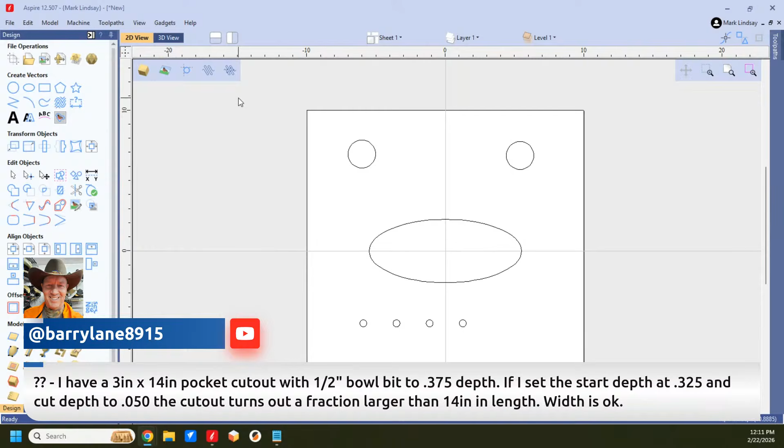I've got, let me add another sheet here so I don't get rid of my demonstration. So we're going to add a new sheet, and I'll call it sheet 2. I'm going to go over this. So you have a 3-inch by 14-inch. We're going to go for 0, 0, and your width is 14, and your height is 3. And we're going to create that rectangle.

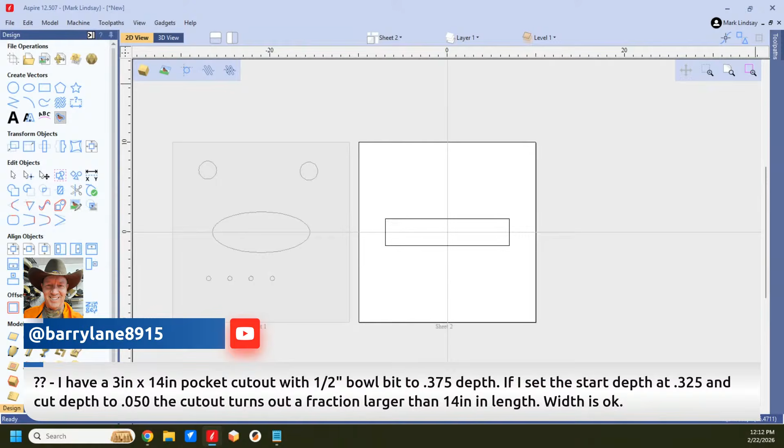All right, then we're going to hog it out. We're going to use a bowl bit. You have a 1/2-inch bowl bit. I think I'm going to go with, I have a 3/4 inch. Let's see here, maybe I can do it with the 3/4 inch. I'm using a pocket cut, and you want to go 3/8 of an inch deep, so 0.375.

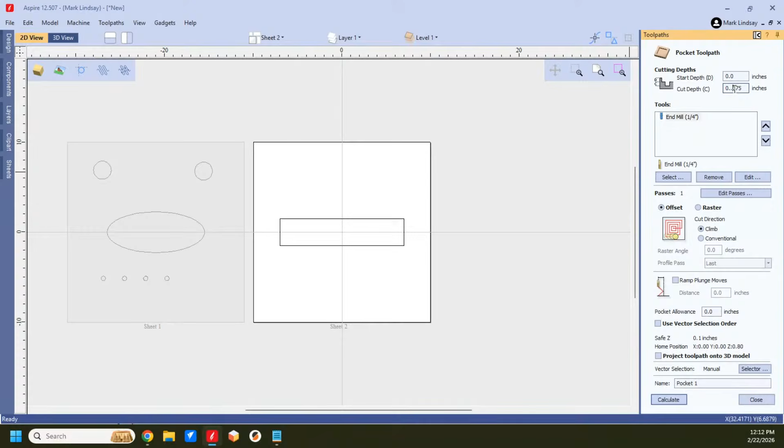And let's see, we're going to get rid of that. I don't know if you're hogging it out with something else. Oops, get rid of a decimal, don't want to make that mistake. Remove. And I'm going to select my 3/4 inch bowl and tray bit. See, there's that curve, but it's basing the size of the cut off of the center of the bit. That's where it plunges in. And we're going to select that.

Now, if you come down here and we look, it's going to go 0.375. Let's get rid of that decimal, I thought I did that. There, it's going to take 3 passes.

Now you want your last pass. I clicked on Edit Passes. You want your last pass to be 50 thousandths. What we're going to do, you can see we've got 3 passes here, and it's going to take them in 1/8 inch bites, 3 1/8 inch thick passes, or deep passes.

You can set a last pass thickness of 0.05, like you said. Click Apply. And now what it's going to do is use that bowl bit to hog those 3 out down to 0.325. Then the last pass it makes, it's going to go ahead and plunge down to that 0.375 depth.

This will take care of that issue. So you're doing the entire thing with that bowl bit. There's no misalignment, there's no assumptions. When you create 2 separate tool paths to do this, you introduce variables. You introduce the accuracy of your machine, the accuracy of your control software, the repeatability of all of these things.

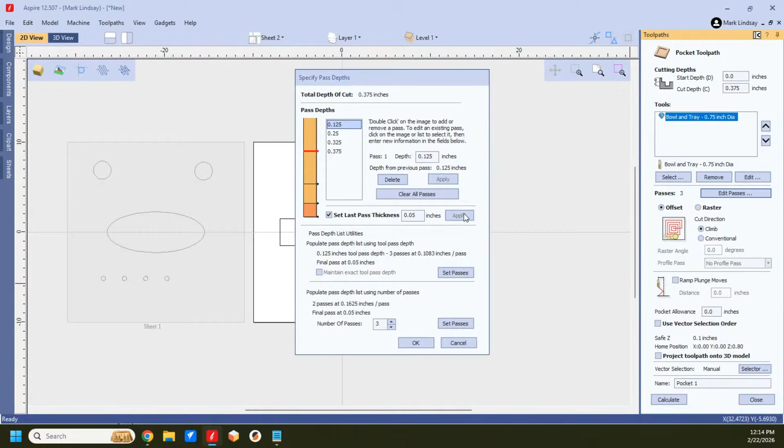So by just setting a last pass here, and then click Apply, then click OK, it's now 4 passes, but that last, okay, you are using another bit to hog it out. Personally, I just use the whole bowl and tray bit. I would just use the bowl and tray bit. You're going to get a better final result.

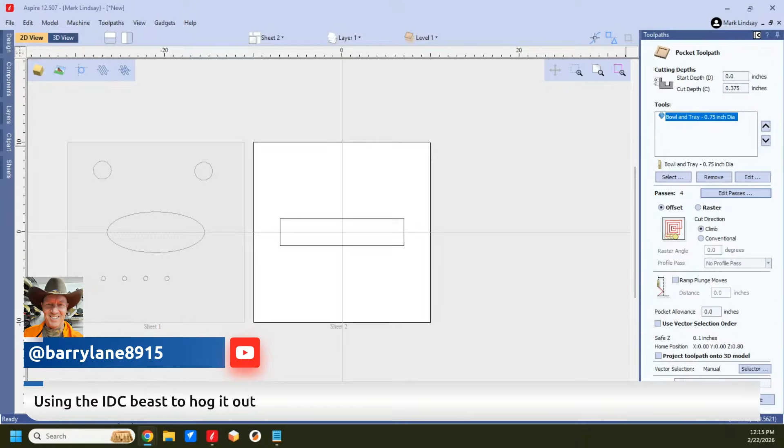Yes, using that beast to hog it out may save a little bit of machine time. But here's where we get into the priorities. If the priority is to hurry up and get it off the machine, you may have to compensate this bowl and tray bit with your start depth of 0.325. You may have to compensate for that misalignment or for that variable.

Now, if it happens every single time you've tried this, there may be other issues at play. But if it's a one-time thing, I would still prefer that 1/2 inch bowl and tray bit, that 1/2 inch bowl bit. It can handle stress, believe me, it can handle it. So I would just go ahead and use the one. I wouldn't even bother hogging it out with the beast.

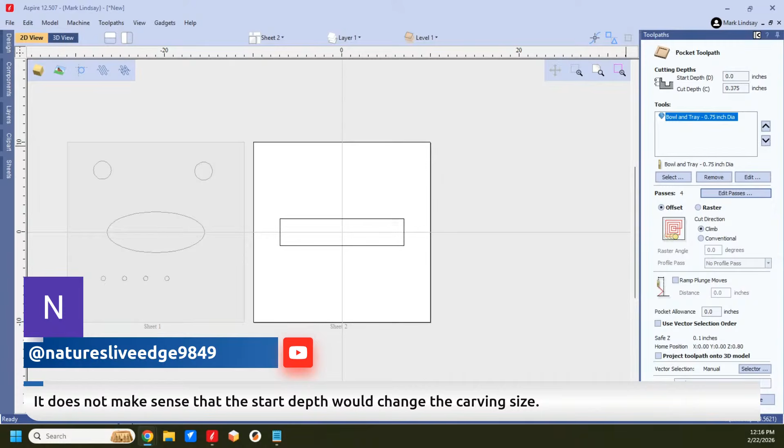No, it does not make sense to me either, Pete, but that's the way it was explained to me. Basically, what it is, let me get back in here. The software is trying to compensate for this shape, but basing the toolpath calculation off of the center of the bit, and sometimes it can get thrown off a little bit here and there.

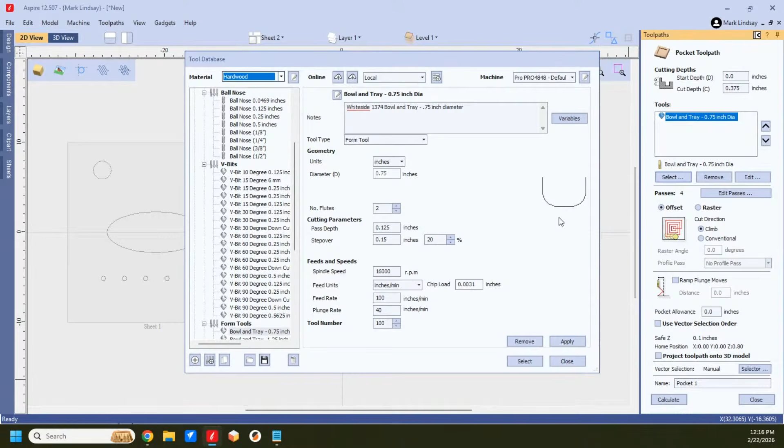And again, that's because of the tolerance of the software. Let me check what my tolerance is. I believe I'm still at 0.0004. Toolpath settings, 3D toolpath tolerance, yes, 0.0004.

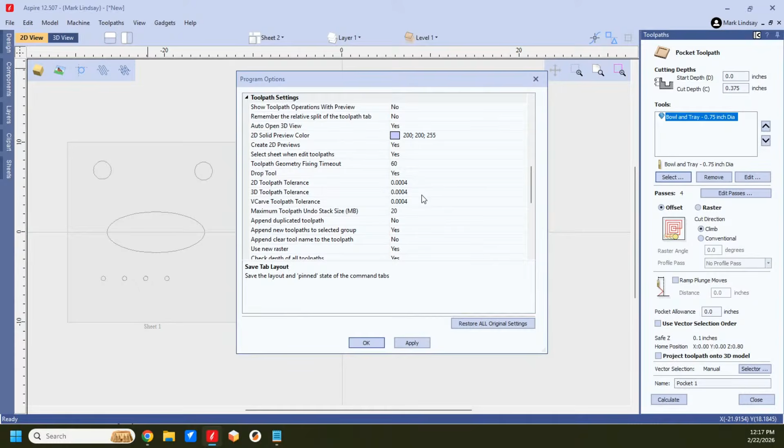That'll get me fairly decent repeatability. But then what is the tolerance of the control software? And what is the tolerance of the machine? The control, Mach 4 for instance, had a tolerance of 1 thou, so it would get you within 1 thou. But also we have to look at the tolerance of the machine. So this, the Avid, is half a thou, that's the tolerance on it for repeatability. So you've got a 1.5 thou variance right there.

Now we've got to take into consideration the actual dimensions of that bit. It's a 3/4 inch diameter bowl bit, but 3/4 inch diameter is nominal. What is the actual diameter? So you see what I'm getting at. There are a lot of different variables at play that can all pile up to throw it off.

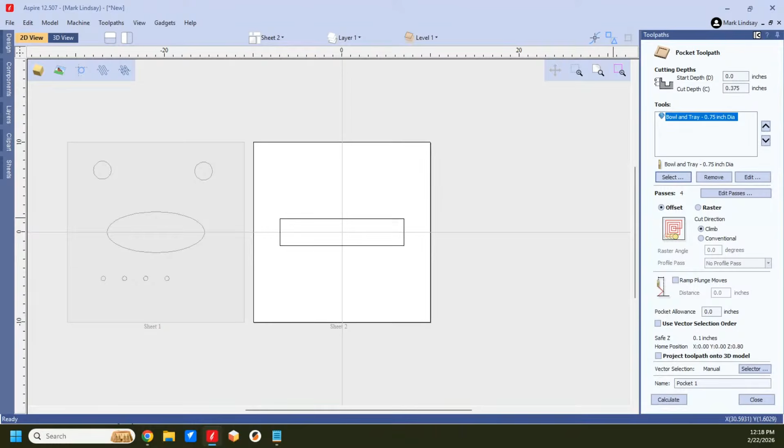That's just been my experience. There's a lot of things that'll throw it off. And like I say, if it's happening all the time, then I don't think those are the issues. I think there's something else involved, be it machine calibration or just the Vectric software compensating for that curve of that bit and making it just slightly larger.

Michael Mezalick says, an option: tell the machine you're using an end mill, but put in the bowl bit. Yeah, I mean, sure. Personally, Michael, my preference is to just go ahead and hog it all out with that bowl bit.

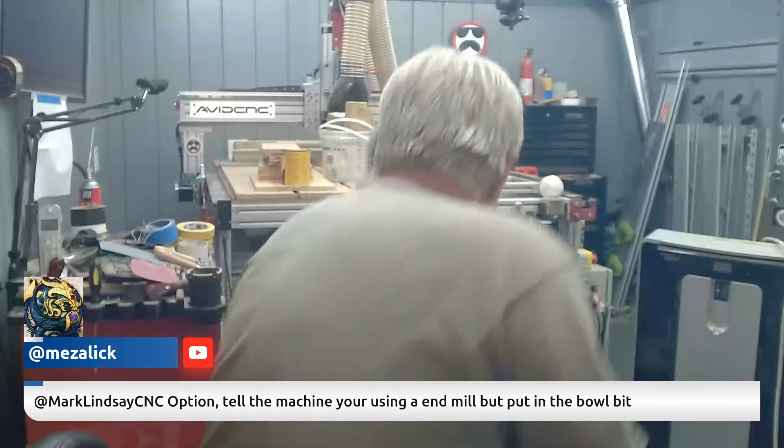Now, I don't know which bowl bit you're using, but this is a Whiteside 1374 that can more than handle hogging out 3/8 of an inch deep. I could probably modify this, I could probably do it in 2 passes. With this machine, maybe a single pass, who knows. But that'll hog out some material right now, mister.

So I just use the bowl bit.

Ellen says, I lie to the machine once in a while. If it works, it works. Yeah, and sometimes you do have to lie to the machine. Sometimes, for instance, a keyhole bit, the tool database will not let you enter any bit that makes an undercut, so you have to lie to it and tell it it's an end mill, for instance.

Dovetail bits, they create an undercut. You have to lie to it.

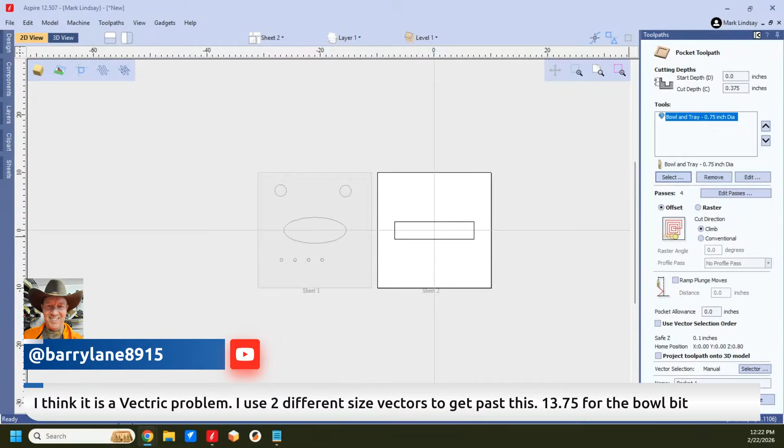I would shoot them an email, let them know what you're trying to do, how you're ending up doing it, and see if they have a cure for you. And ask them if it will be corrected in version 13. Not so subtle hint, Vectric. This is one of the reasons why I just go ahead and use the bowl bit for everything. But that's just me.

What can I say? See, did I miss any questions up here? No, it doesn't look like I did.

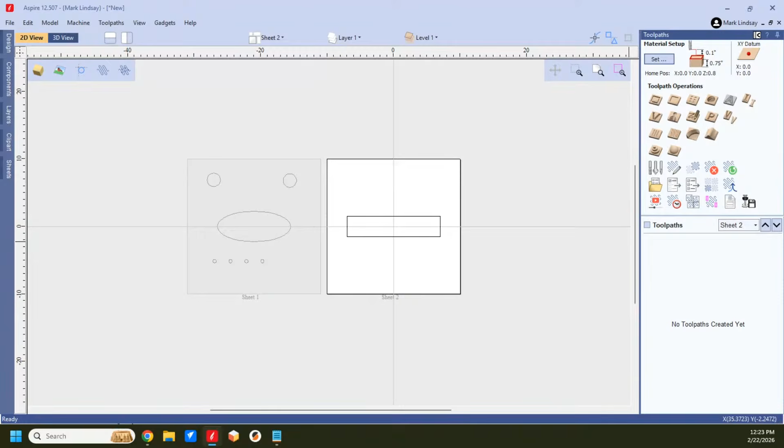Okay, well, while I'm here, I'm going to go back over to sheet 1, since that's what I have my little demo here. I've never done a video on them, but it's something, especially in version 12 plus. A few things have changed in the software. You longtime users, you know what I'm talking about. Vectric changed around a few things in the interface, and they added some extra, I don't think they're calling them toolbars, but I'm going to call them toolbars, up here on the left and the right of the screen.

And they're easy to ignore, easy to forget they're there. I've never seen anybody actually go through and talk about them, so we're going to talk a little bit about what's going on up here in these 2 toolbars.

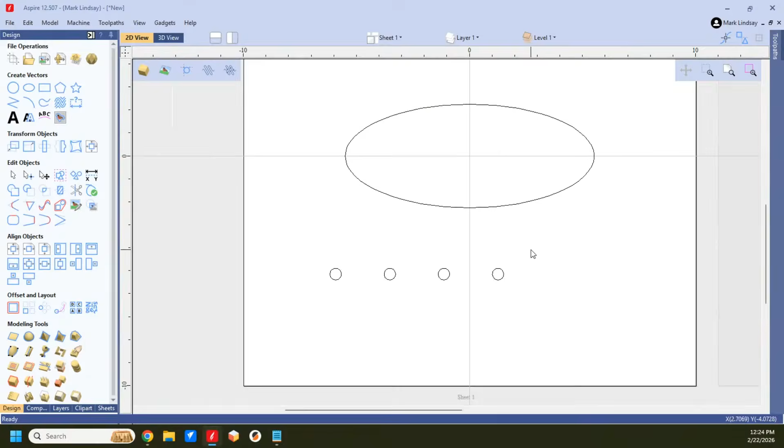The one I use most often here in the 2D view are the pan and zoom controls over here. Now, I don't know even why they included this, I guess some people don't have a scroll wheel on their mouse. But basically, if you click on that icon, you can pan around your view, move around this way and that way, until you click it again and it shuts off. If you have a mouse with a scroll wheel, a lot of people don't know that scroll wheel is a button as well, just push down on it and you do the same thing. But if you don't have a scroll wheel, or it's not a button, you have this up here to help you pan around.

I see some people use the bars here and here, and that's fine, but pushing down on the scroll wheel is just as easy.

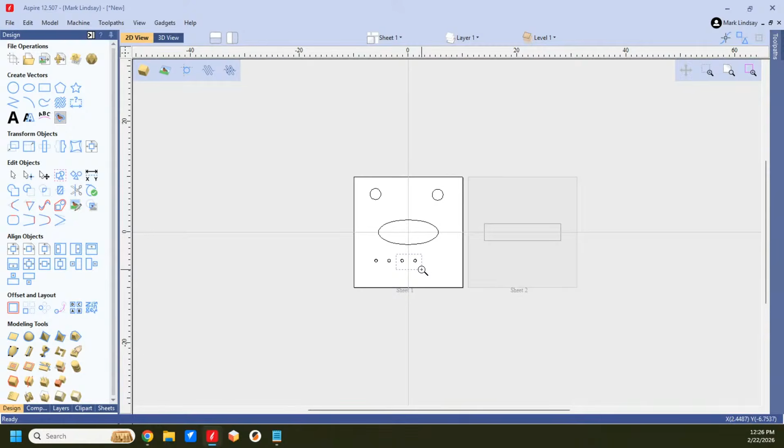The next one over here is zoom your 2D view to a mouse-drawn box. Now this is a single use, every time you use it you have to click it. So I'll click it, then come over here, and you see my cursor turned into a magnifying glass. I draw a box around those 2 circles right there, and it zooms right into those. Just a slick little way, but if I try it again, nothing. You have to click it every time you want to use it. Just a slick little way of zooming in on a specific area.

The next one here, I use a lot. This zooms out to show the drawing limits on your piece of material. So if I just go ahead and click that, it zooms out and it shows the limits of both sheets.

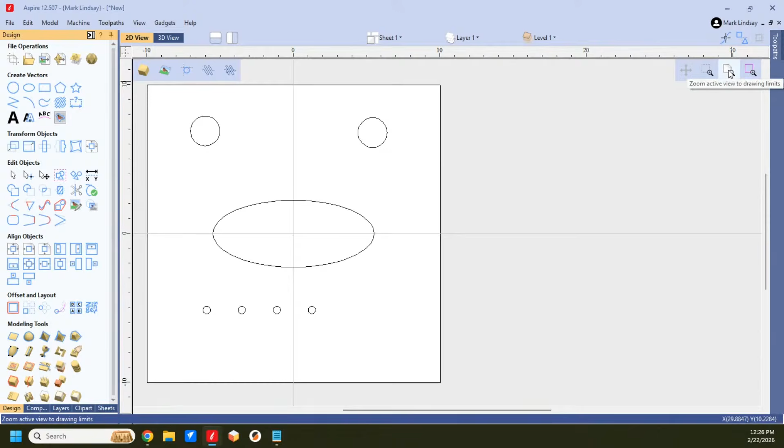Now, if I come over here, select sheet 2 and delete it, come back over to the design tab, and I'm just using one single sheet, and I click that center icon. It puts it right in the center and zooms in so I can see everything. So if I'm zoomed way in over here playing with a little detail, I can just single click and I'm zoomed back out to look at the entire project. I use that one a lot.

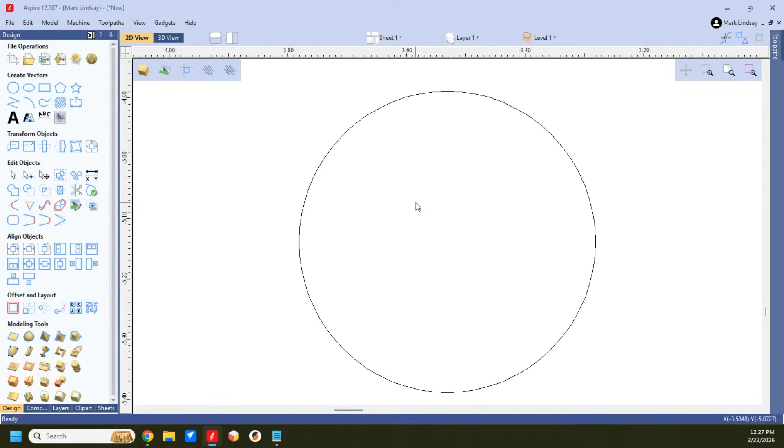Another one we have here is zoom to the selected objects. So if I come over and I select that circle and click on it, it's going to zoom into that circle and put it right in the middle of my screen. So I can do whatever work I want to do with it, maybe draw a crosshair in it or something of that nature, and then just click to come right back out. I use these two quite a bit.

I forget that this is here, the mouse drawn box. I forget that's there. But I never use the pan 2D view.

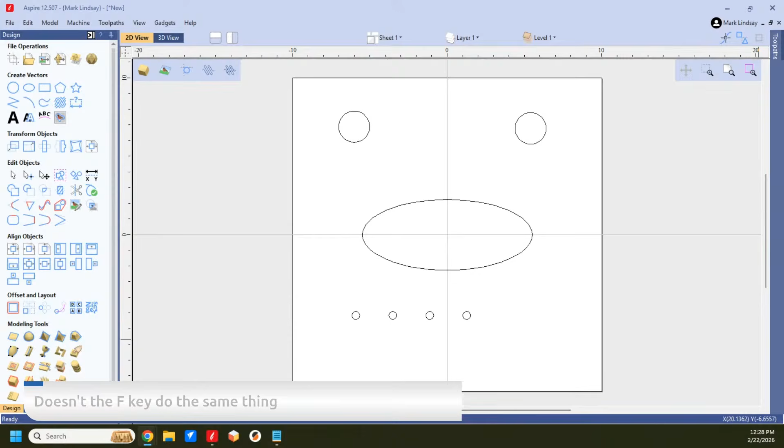Steve Russell says, doesn't the F key do the same thing? You know what? I believe it does. Let me zoom in, come down here on my keyboard and tap the letter F. Nope, it doesn't. Make sure... Oh, it does. Okay, I guess I hadn't clicked back in. So yeah, that's the keyboard shortcut. Hit the F key, then it zooms back out.

If you wonder about keyboard shortcuts, you can come right up here to the help and go right there, second one down, keyboard shortcuts. Oh boy, but be prepared. It will open up a browser window, and there are a lot of keyboard shortcuts. Believe me, be prepared, you'll be overwhelmed.

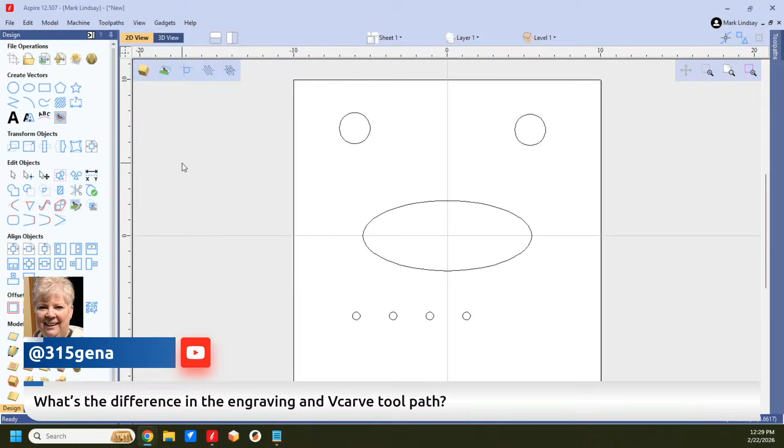315gena says, what's the difference in the engraving and the V-carve toolpath? Let's jump over here. We're talking about the engraving toolpath and the V-carve toolpath. Let's take a look at the engraving toolpath.

The engraving toolpath was, generally speaking, created to be used with something like a diamond drag bit. Now you can use a standard V-bit with it, but it was designed to follow outlines and then do fills, if you want them, with straight lines or a hatch or a cross hatch. You'll see down here, you've already got your saved toolpath. It will preview, but the preview is going to be light because this was designed to be just basically scratching the surface of something like brass or anodized aluminum or something of that nature, again using a diamond drag bit.

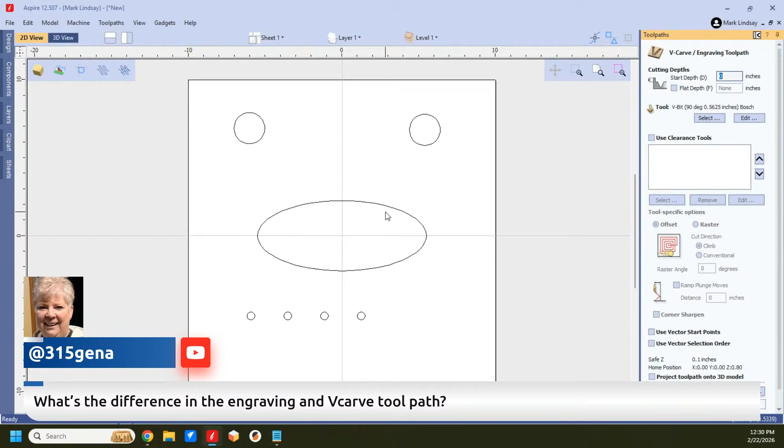A V-carve toolpath is meant to be used with a V-bit and maybe a clearance tool. It's used basically, as the name implies, to carve between two vectors. The depth of that carving is going to be determined, again, by the space between those vectors. V-carve toolpath will give you square corners, should you have any in your design.

Where the engraving toolpath is going to follow the outline, and then if you add a fill, it will do a hatch or a cross hatch. It's not going to carve this out in the middle. It will do a fill to give you a hatch or cross hatch if you want it, or just an outline. It's not going to carve out the middle. I hope that answers your question. And it's a good one too.

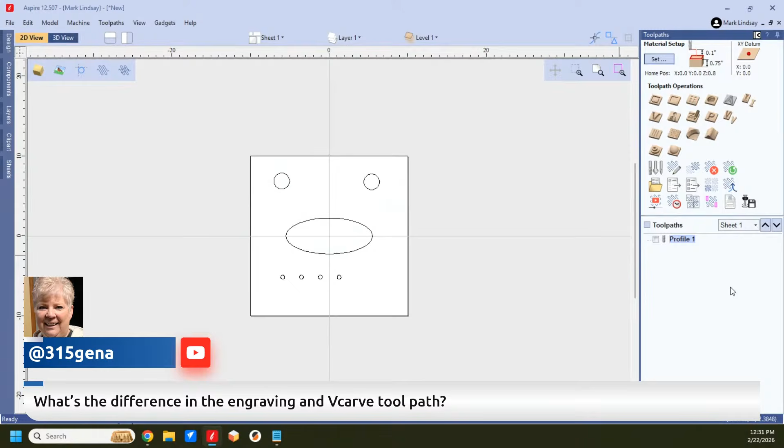And now you see I have a toolpath here. I'm going to jump over to this side, back into the 2D view here. I don't have a 3D model in this design, but if I did have a 3D model in this design, I could turn it on and off here. Grayed out means it's turned off. The color means it's turned on.

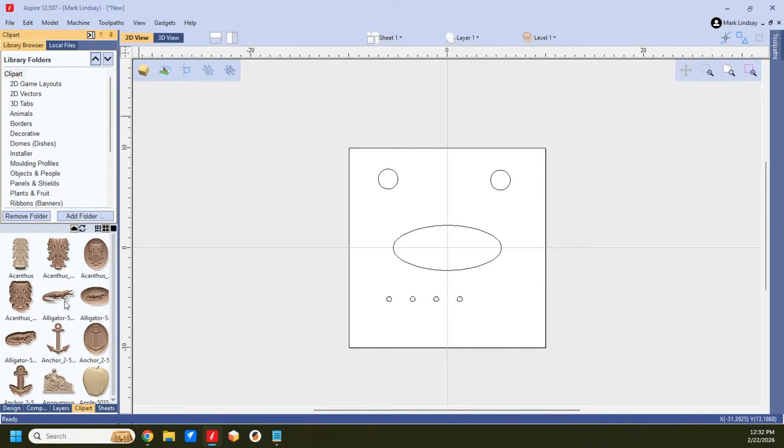Let me throw in real quick here some clip art. Let's throw a Wally in the middle. And there we go. Now that's a mess. I can turn off that 3D component right there, and I can turn it back on. Just depends on whatever I need to do over here in the 2D view.

This one is turn on or off the bitmap. So rather than having to go up here to the layer manager and turn off a bitmap layer, you can just toggle the bitmap on and off right here. And that comes in real handy.

This one toggles the guideline visibility. If you have guidelines out here, you can come right up here and turn those guidelines off. You're not deleting the guidelines, you're just turning them off so you can't see them. You'll notice it's grayed out. Then I can turn them off right there, or turn them right back on.

Also, this corner of the ruler, that's a button. That'll turn off the guidelines as well. Again, it doesn't delete them, it just turns off their visibility. So let's shut them off, I don't need them.

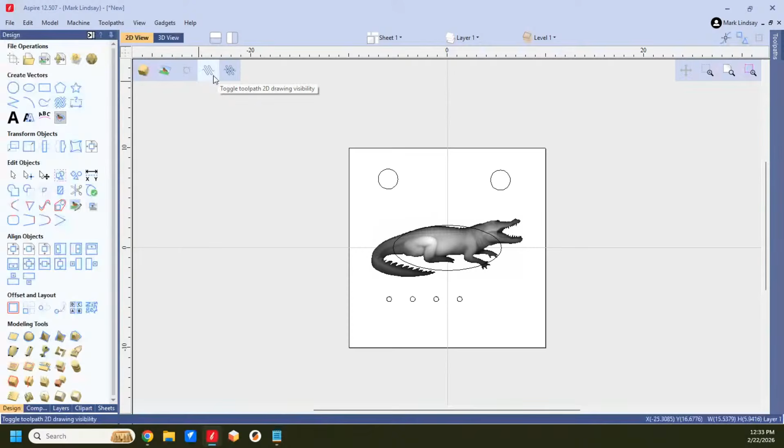Now here, this is something that comes in handy. I'm going to turn off Wally here. This toggles toolpath drawing visibility. If you're over here working in the design tab, rather than going all the way back to the toolpath tab and turning on that toolpath, you can just turn it on and off right here.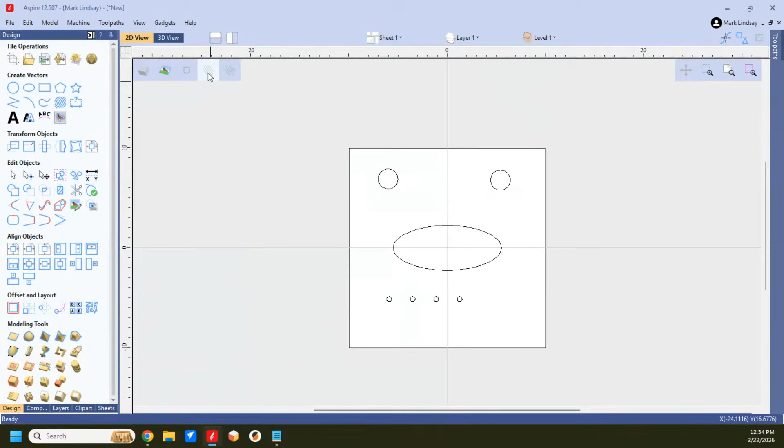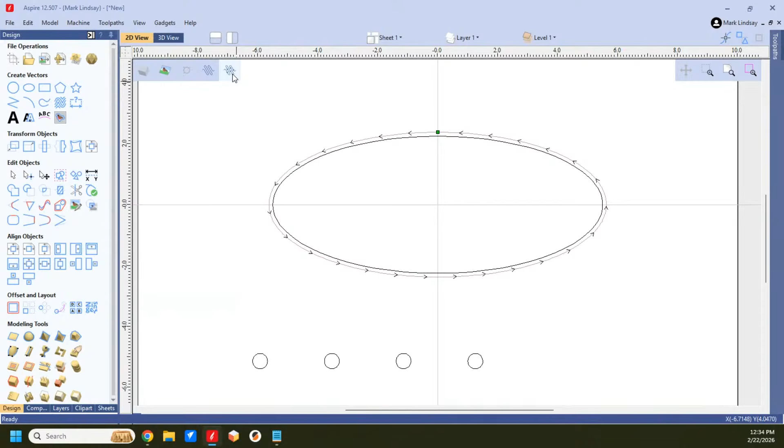Now the next icon over here is the drawing style of the toolpath. Let me zoom in here a little bit so you can see better. This is what they call a wireframe display. You got your start point here in green, and it's showing you with these arrows which direction that bit is going to cut. Well, if you want to see how close that bit is going to get to the actual vector, you can come up here and change this from wireframe to solid.

Now that's going to tell you, based on the diameter of the bit you selected, where that toolpath is actually going to cut and how close to the vector you are. This comes in real handy, believe me.

When you come over here, let's go back into the toolpath, and let's say you did... it's not an allowance offset, there should be a boundary offset here. Oh yeah, the allowance offset. Let's say you do an allowance offset of, let's make it something big so you can see it, 0.1.

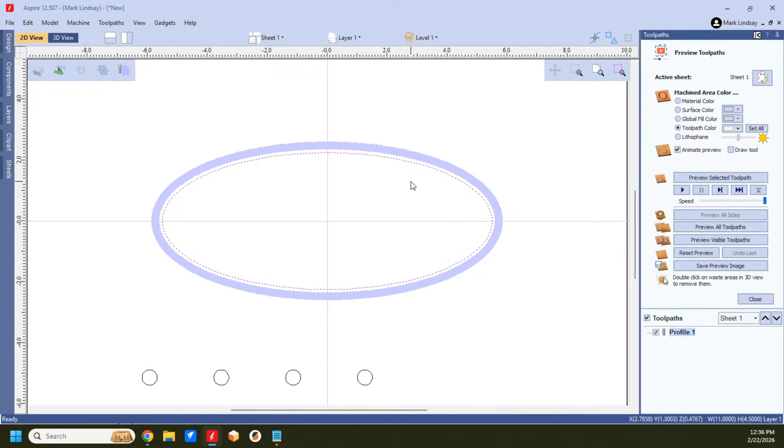Now, it's a positive number. If I calculate that, and let's go back over to the 2D view, now we can see what that did. I'm in solid, and that is now 0.1 away from the vector. A positive number moved it away from the vector on an outside cut.

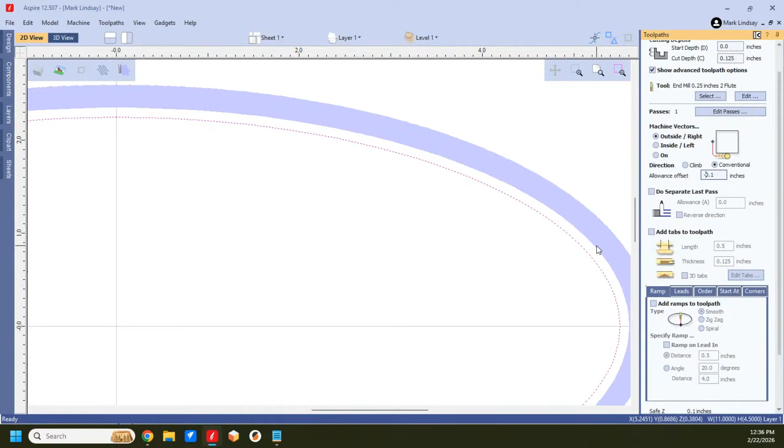Let me go back into it here. Let's make that negative. A negative number is going to pull it in closer to that vector. Calculate that, back over to the 2D view, and we see now this edge of that bit is going to cut 0.1 inside that vector.

Now, we were talking about the bowl bit just a little bit earlier. Let me close the preview here. We talk about that bowl bit in a pocket toolpath. Pocket toolpath, all right. Model thickness exceeds material thickness. What are you talking about? Oh, he's talking about Wally.

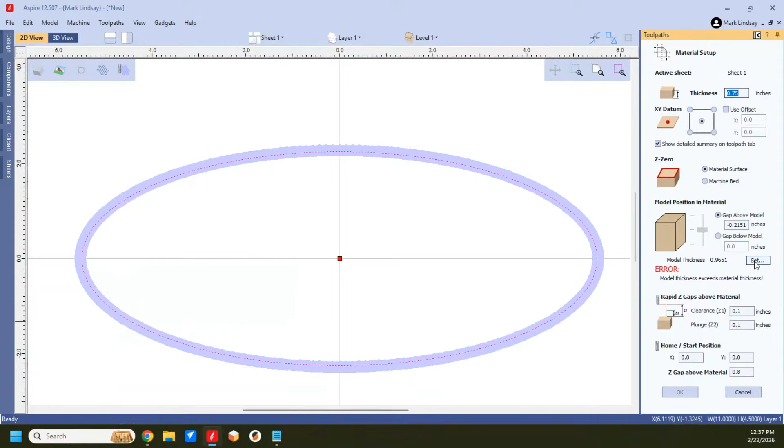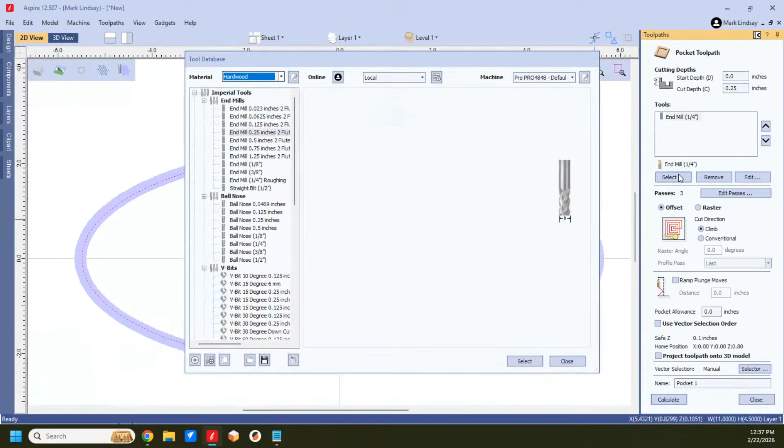Select, I can do a... where's it at? Find it. A pocket allowance here. That pocket allowance is going to work absolutely the same way. Since you're pocketing it out, if you go with a negative number, it's going to come in. If you use a positive number, it's going to work its way out. So you have that option here. In the pocket toolpath, it's called a pocket allowance, right down here.

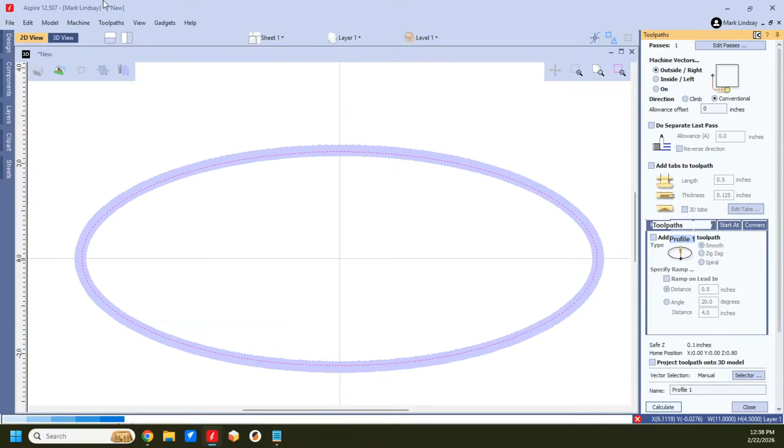Whereas on a profile toolpath, it's an allowance offset. Set that back to 0. Recalculate the toolpath. Go back over to the 2D view, and I'm right back on that vector again.

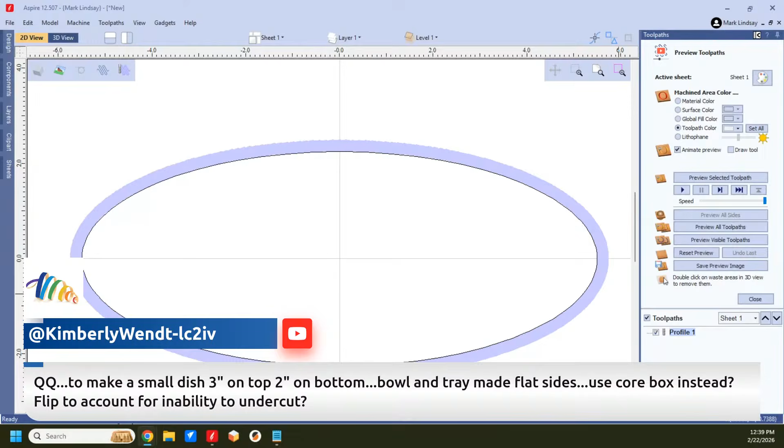All right, Kimberly Wendt is asking about making a small dish, 3 inches on top, 2 inches on the bottom, bowl and tray made flat sides. Use a core box instead, or flip to account for the inability to undercut. Okay Kimberly, are you talking about the outside of it? You want it 3 inches on top, 2 inches on the bottom? Or are you talking about the slope inside the bowl?

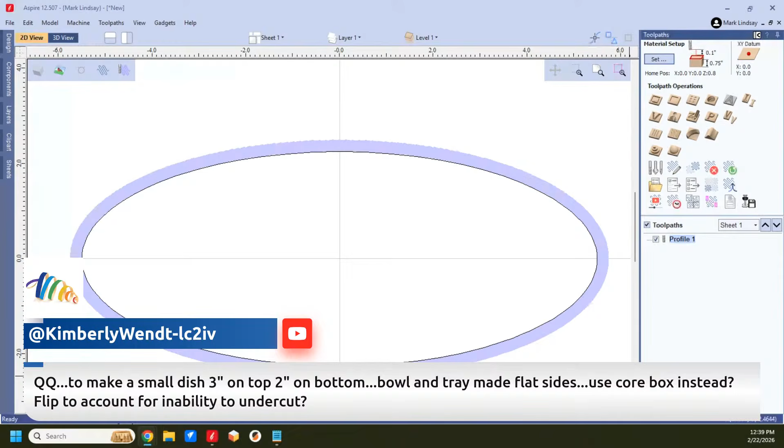If you're talking about the slope inside the bowl, if you have Aspire, you can create a model for that. If you have V-Carve, you can use the molding toolpath for that, to create that. Then it's a swept profile that will create that taper. I have a video on creating tapered holes with V-Carve using the molding toolpath. You just won't go as deep as I went in that video. Let's see, I'll... tapered holes.

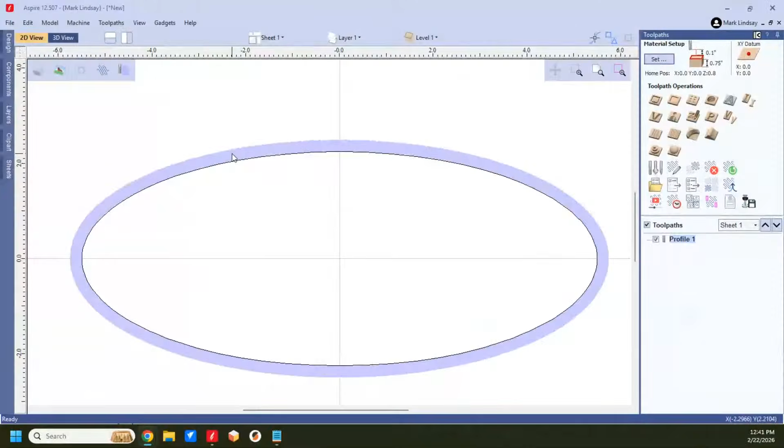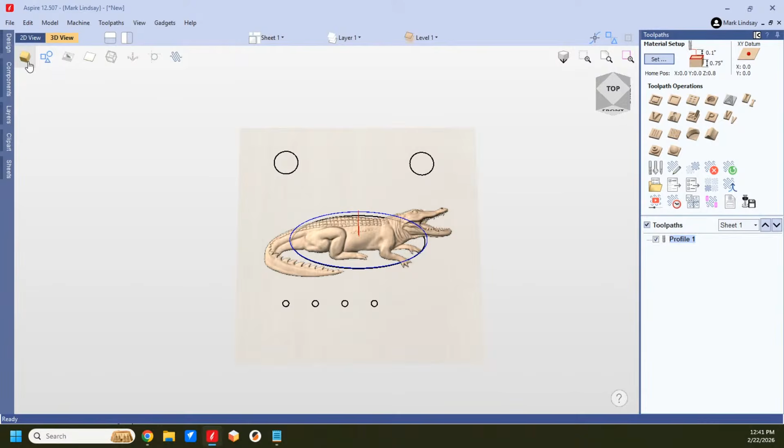So those are basically the icons over here and over here in the 2D view. Now when we switch over to the 3D view, you'll notice Wally is still there. I have him turned off, and I can still see the toolpath and everything and all my guides. I can turn off my guides right here. These are pretty much the same. I can turn off the model, I can turn off the vectors, but I can turn the toolpath on and off, but I can't change the drawing style.

Not yet. I don't know if that's coming. But there are a few other things here as well.

Let me put Wally back up. So I've got Wally here, everything is great. Here is where I can turn on and off vectors. The vectors are now turned on, now turned off. Bitmap, same thing. I can toggle the bitmap, turn it on, turn it off.

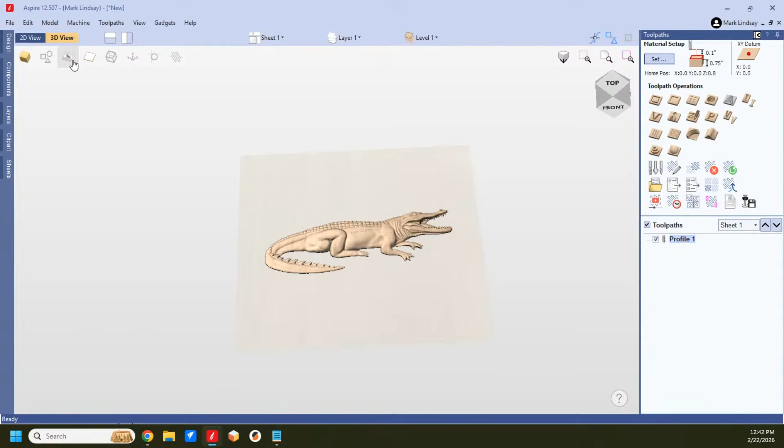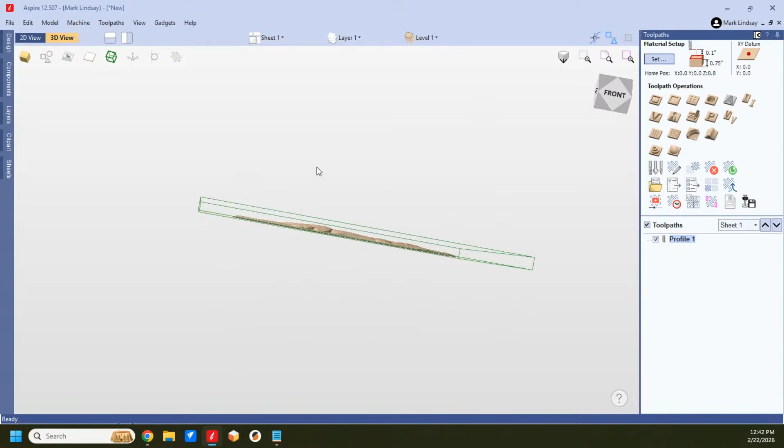Now this is going to be subtle because I don't even know if you can see it, but this one here will turn off the material, so you're just looking at the model itself. And turn that material block back on. This one sometimes comes in handy. This draws the whole material block so that you can see where that model is, how it's going to be cut.

This is your material block based on what you put in your job setup. So you can toggle that on and off, and that comes in handy every once in a while.

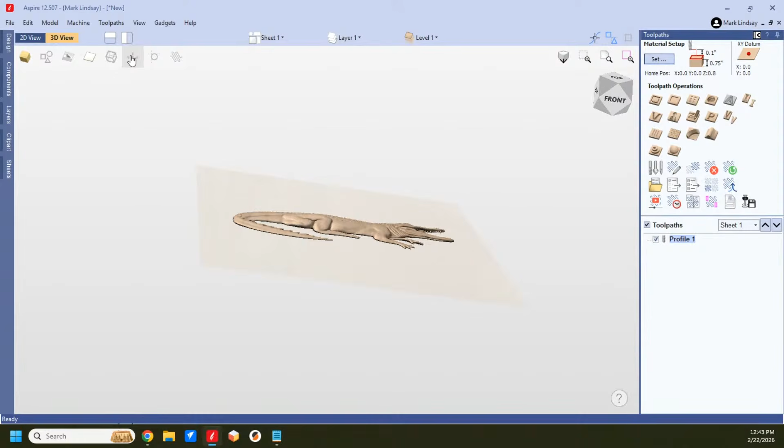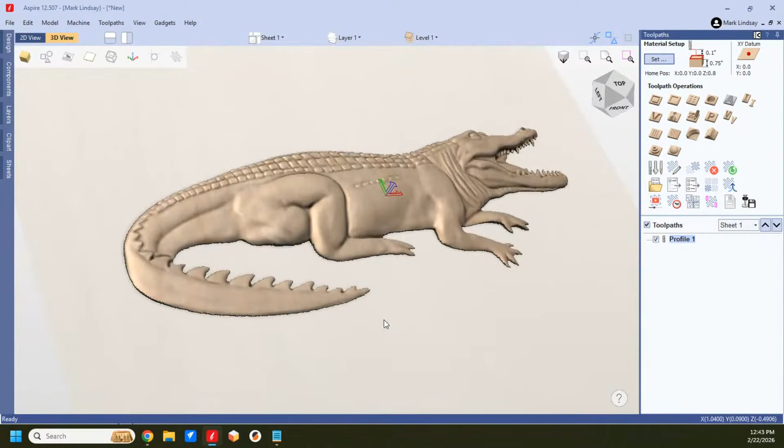Then you have your X, Y, and Z zero origin. That is this arrow right here. Blue being Z, red being X, and green being Y. The location, when you turn this origin on, the location of it on the material is based on, again, what you entered in job setup.

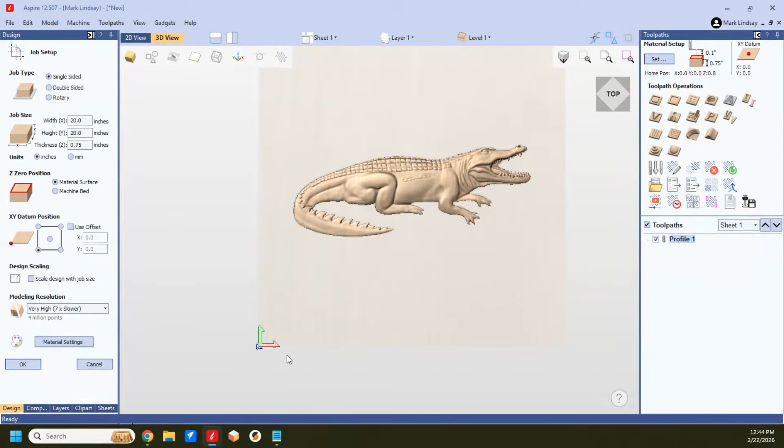Go back over here. I have my XY datum position set to the center. If I change it to the bottom left corner, you see that the origin moves to the bottom left corner. That's just one of those little reminders of where you have your origin set. Now, if I hit cancel, it goes back to the center because I never actually changed it.

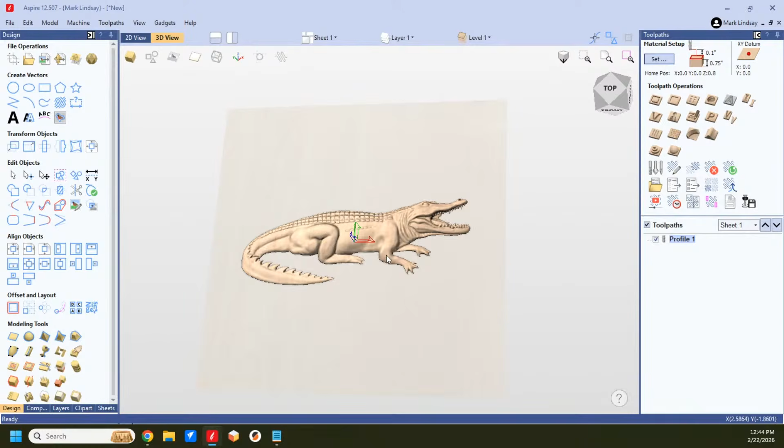So let's go ahead and turn that off because I find it distracting. Just me. These three remain the same. You have zoom to a box, you have zoom out to show the full material, then you have zoom into a selected vector or component. I don't have anything selected, so let's zoom in on Wally. These three are the same.

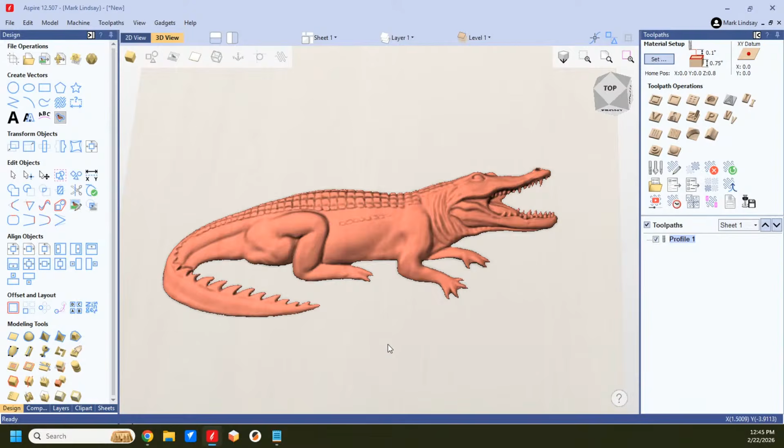Let me go back to a straight top view. Now, when I click on this one, it's going to move around to straight camera views. I can't remember what this is called. And the 3D view doesn't have the pop-up bubbles. That's something we got to talk to them about.

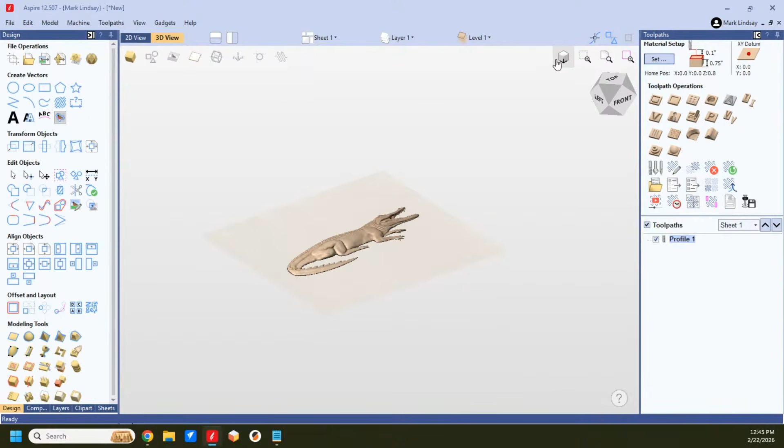So those are basically the controls up here in these toolbars. And you'll notice in the 2D view, I have Wally turned off. But if I jump over to the 3D view, these controls are independent of the controls on the 2D view.

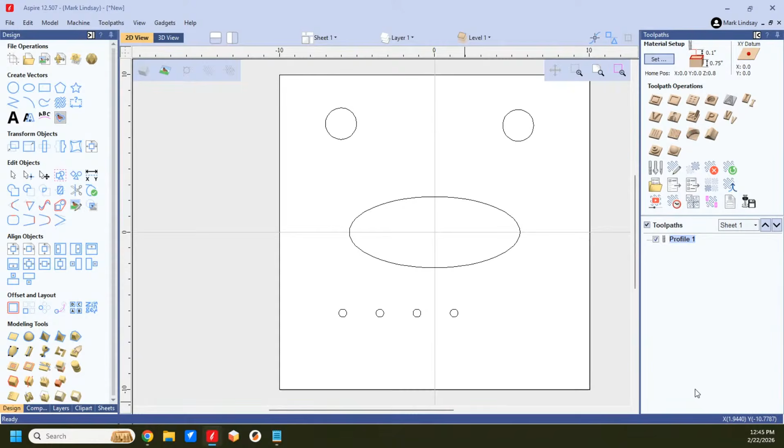So now Michael Koenig says, using the draw line polyline, is there a way to get it to where I can pick a point, then enter a number for length? Yes, there's a couple of ways of doing this.

We'll go up here into the Draw Line tool, and that's what all of this is for, up here. Let me hit the letter S so I'm drawing a line, and I'll click here and start moving in that direction. All right. Now I can go, let's say I need 2 inches. 2.0, enter. That's all I just typed, and this line segment is 2.0 inches.

Now I hit the space bar, and that's it. So basically, start your line wherever and head in the direction you want to go. 6.0 and hit enter, and it draws a 6-inch long line. But this is still attached, so now I can move over here and go 5.0, enter, and it drew another segment 5 inches. Now I can come down here and I've got 6.0, enter. Then come over this direction and just hit tab, and it closes the vector.

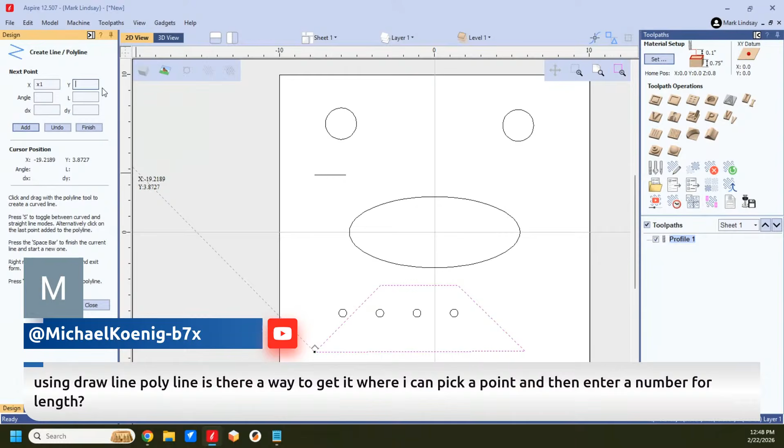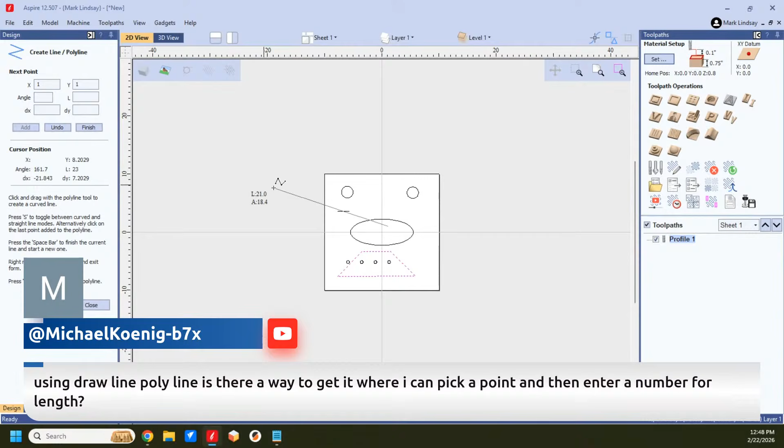Another way of doing it is using these boxes up here. You can enter a point in relative coordinates, or absolute coordinates. So let's say I want to go to x1, y1 - it's going to make my first point at x1, y1. Then I'll click add, and there is my point. Wait a minute, what am I doing? Mark, undo. I just want x1, y1. There, so that's my first point.

Now, to draw a vector, I need a direction and I need a length. So for my next point, I'll have to clear that out. I can either enter an absolute coordinate up here, or I can enter an angle, 90, and a length, 2. Click add - so it did a 90-degree angle, 2 inches long. So for my next point, I can enter negative 45, length 3, add, and it put me a point down here.

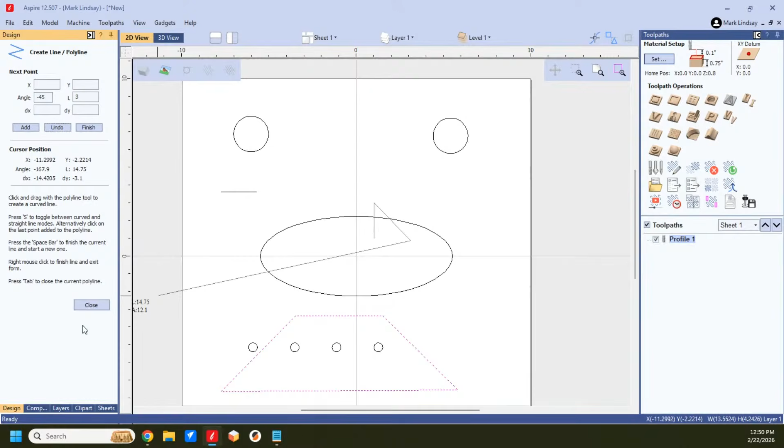Then I have a choice - I can either come up here and hope I get the end, or move in this direction. Click, I have to close that... no I don't, come on. Move in the direction, click tab. Why are you not doing it? Well, ain't that a revolting development? All right. Now, why didn't that close that vector?

So anyway, there's a couple of ways there, Michael. You said that's what you used to do and it's not working now - make sure you're moving the cursor in the direction you want that vector to go. It needs not only a length, because if you just enter a length, it doesn't know which direction you need. So by moving your cursor, just click and move in that direction, then type in a length and it'll do the rest. You have to give it a direction. 0.75. So, okay.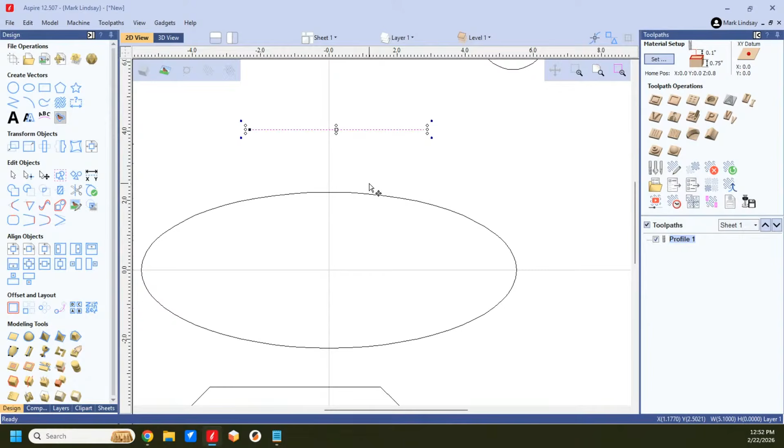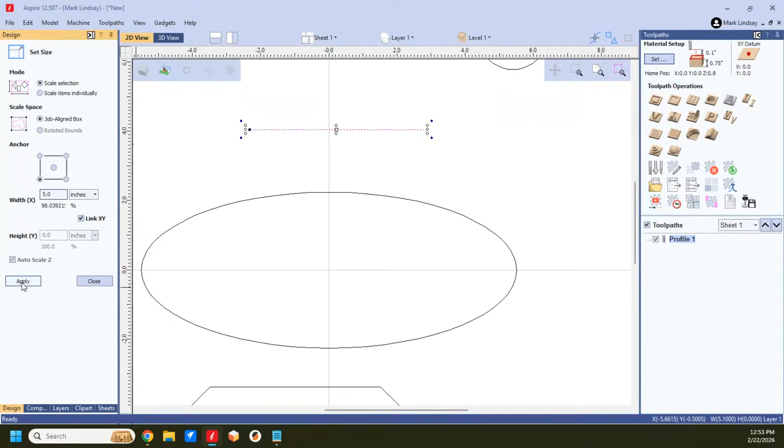So remember that a vector is an object. I don't even know how long that is, but with it selected, I can come over here to resize. I see now it's 5.1, let's make it 5.0. Click apply, and it scales down. Now this time I anchored it in the center - what I should have done was left or right, unless I wanted to change the size from the center. So we'll Control Z that. I'll anchor it here so it gets longer in this direction. 5.0, apply, close. So you can change the size this way by using set selected object size.

But when you're drawing, it needs to know a direction - it has to know which direction as well as a length. So, okay.

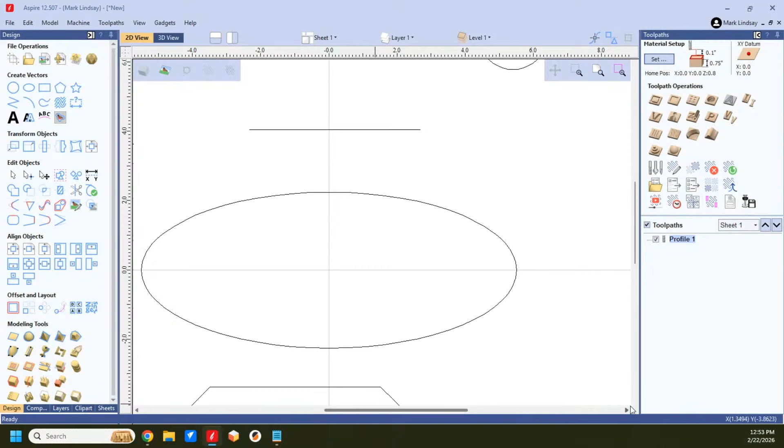Well, we've been going for about an hour, so I think I've gotten every... Okay, Michael Koenig says he thought maybe something had changed with the update - now it beeps when he tries it. If it's beeping, there may be something else going on. I don't know how long it's been since you've restarted, but you might want to save any file you got open and restart the software, then reopen that file and see what's going on. I don't know, Windows has been trying to force an update on my computer.

I need to do it, I just haven't done it. But that's something to look into as well - you might have to restart the software, you might have to restart the computer. If that doesn't solve it, send an email to Vectric support, especially if when you click it just beeps - there's an error, there's something going on inside the machine there. So...

All right, I think I'll go ahead and wrap this up for this week. Like I said, I didn't really have a topic, but I hadn't seen anybody really go over those two toolbars that were added in version 12.

Still no word on version 13. They keep that info pretty close to their chest. They haven't even set up a beta group for version 13 yet.